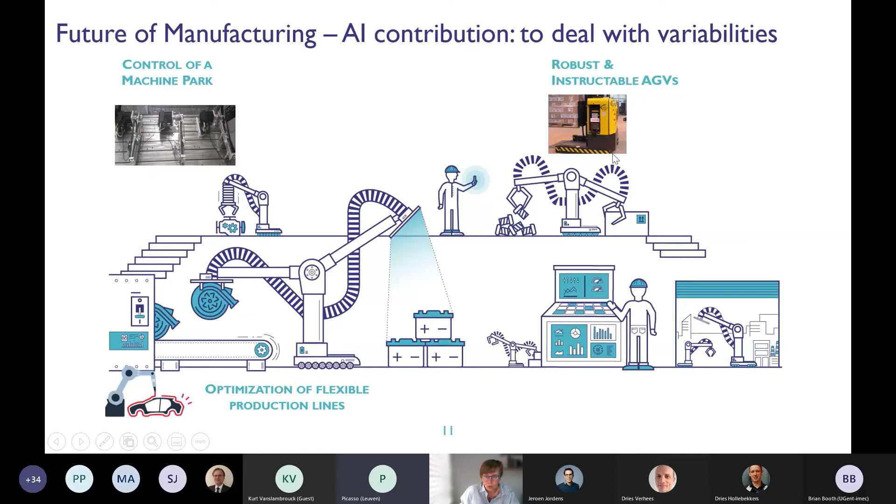It's one of the major topics of this webinar, but there's a whole series of webinars, and in the coming sessions you will also hear about our other applications or use cases, which can be control of a machine park. Also the AGVs, having robust and instructable AGVs. How can we also control robotic arms, collaborative robotic arms? How can an AI system assist an operator in, for instance, an assembly task? So the operator in interaction with the AI system is a very recurring topic.

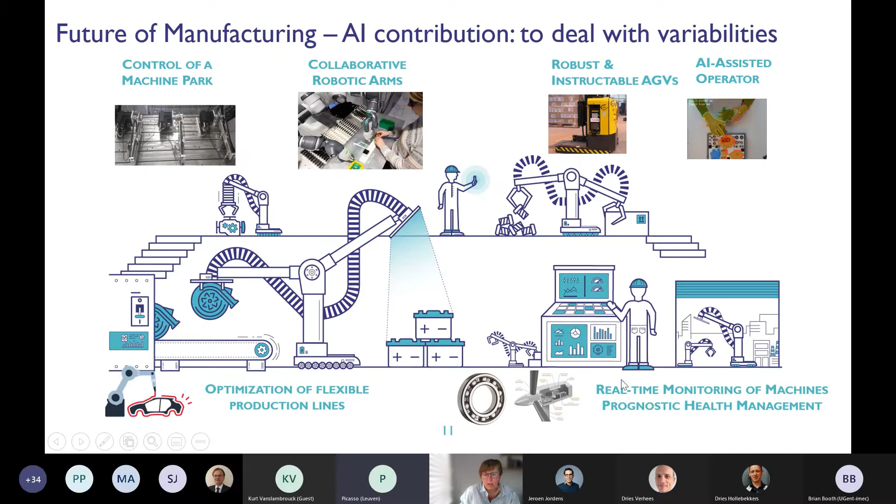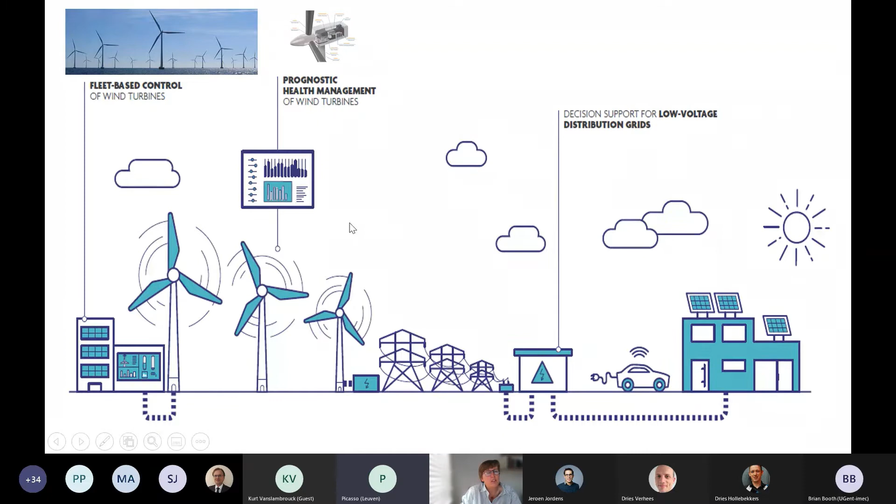But also other topics like real-time monitoring, anomaly detection, prognostic health management, and also a webinar is coming up on that in June. I showed the manufacturing plant, but the same can apply to energy, where we are looking into prognostic health management not only of industrial machines, but also wind turbines, or also at fleet-based control of wind turbines.

It's about the analysis of anomalies, for instance, in time series. It's sensing. It's about AI in the edge. So it really shows that the generic research challenges that we are tackling can really be applied to various applications. But let's go further into this series of which we have the first webinar today. So the use of AI for smart manufacturing and smart monitoring.

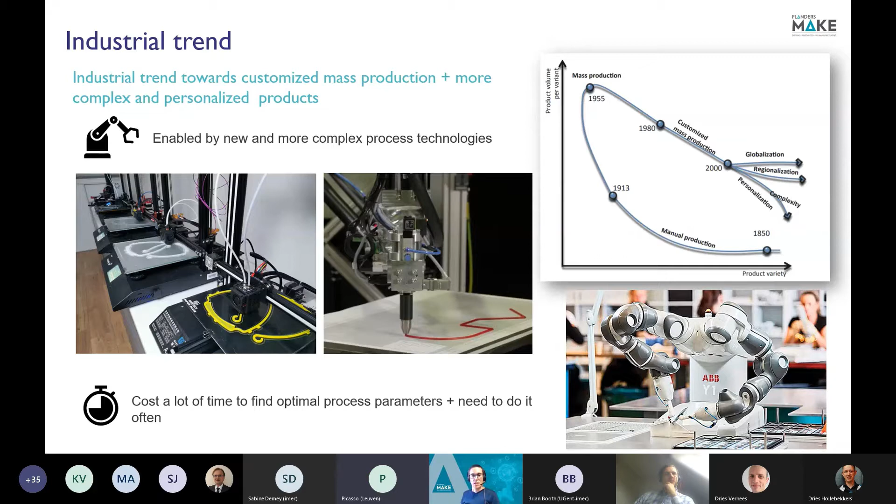The downside of these new technologies is that it costs a lot of time to find the optimal process parameters because they're more complex. And also you need to do it more often because it's personalized products, so the design can change from product to product. That's also what we're facing in the Joining and Materials lab at Flanders Make. So in this lab, we help companies or customers which have questions regarding adhesive bonding processes.

For example, if they want to join material A with material B, then we can guide them with selecting the proper adhesive or with designing the joint. But also we perform process optimization, where we really optimize the adhesive bonding process, all the parameters, not only on a lab scale, but also on an industrial scale. We have several industrial robots like the one you see here, which we use for this purpose. And in the end, we can also do validation, so also the real testing of the pieces.

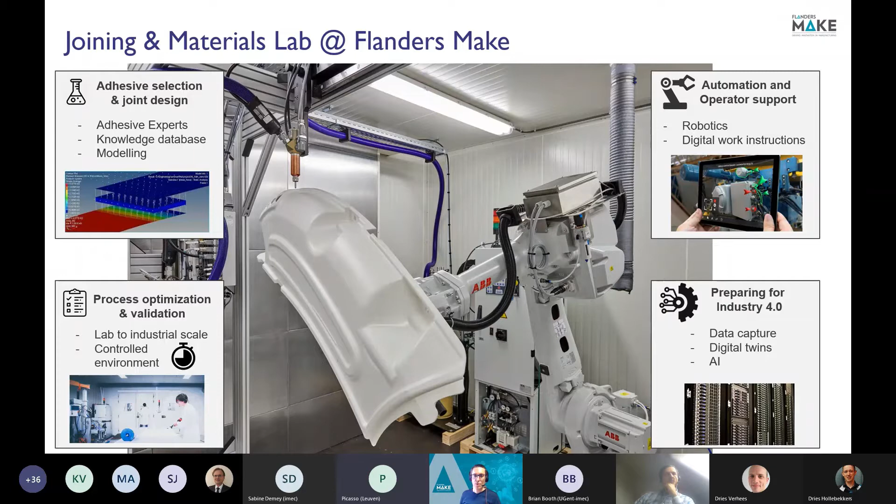Now, what we see is that during this process optimization, it takes a lot of time to find the optimal solution. So in order to tackle that, we're using different approaches within Flanders Make. One is automation and operator support. Another one is Industry 4.0. And AI is one of these technologies, and that will be the topic of the talk today. So here we want to enhance process optimization of an adhesive bonding process with the use of AI.

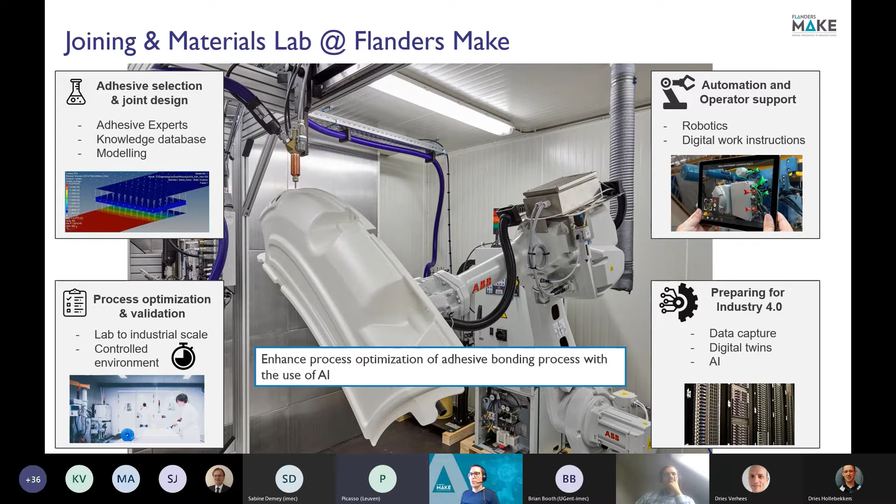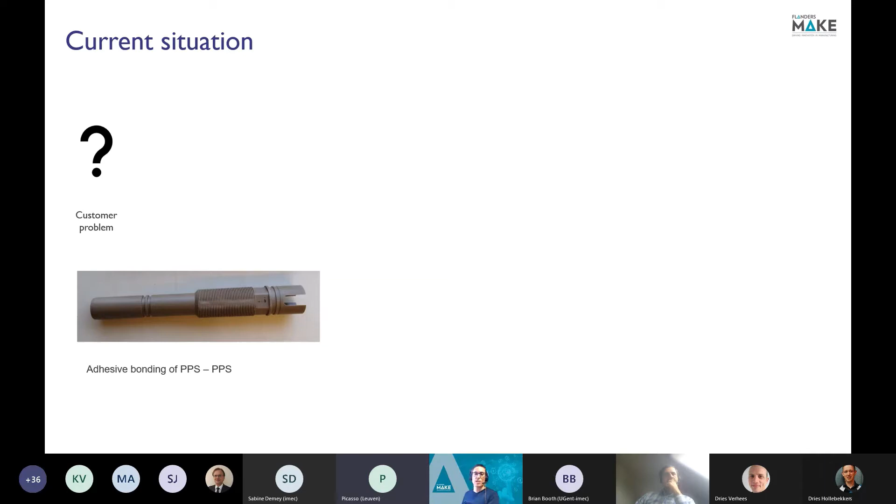So how do we currently perform process optimization, without AI? We first start from the customer problem. For example, if they have an adhesive bonding of two PPS materials, two plastic materials, we look at in what application this product will be used. And based on the problem, we define objective and constraints. For example, a bonding stress of minimum 8 megapascal, standard deviation below a certain threshold, and no visual damage as a constraint.

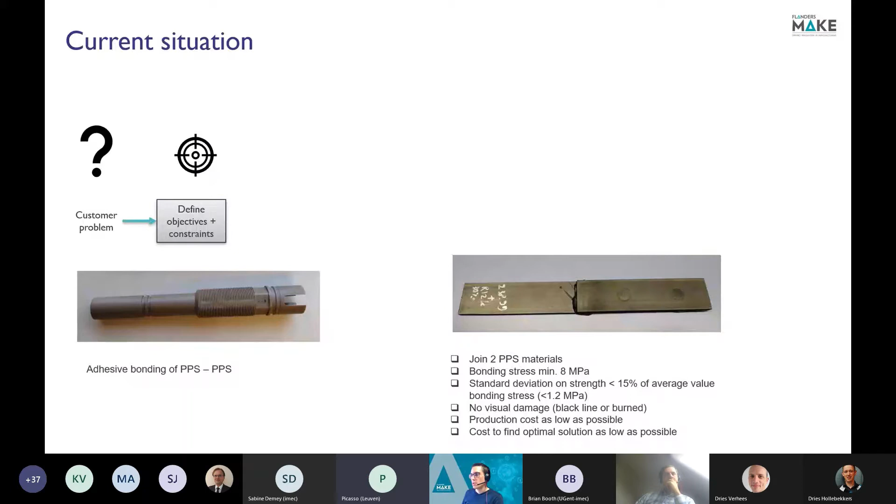Then the next step is that we select appropriate processes, parameters, and a suitable range. If you look at the adhesive bonding process on the high level, it consists of 3 main steps. First, you prepare the materials, the substrates. Second, you prepare the adhesive. And the last one is that you join everything together so that you create a product assembly. Now, within each of these steps, you can have several sub-steps.

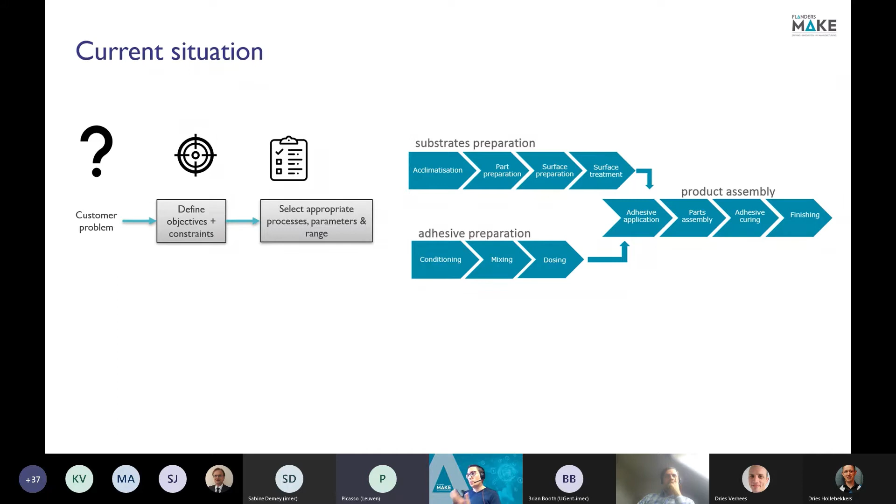For example, surface treatment, where you really prepare the surface of the material. You can do that in different ways, using several processes: laser treatment, grinding, grit blasting, plasma treatment, for example. So we say, for PPS, plasma treatment is a preferred process. Once we know that, we move further and select parameters which we think are useful to optimize. In this case, we selected 6 parameters, and we also define a range in which we think the optimal will be positioned.

Now, if we would test all the possible combinations of all the 6 parameters with all the ranges, it would be a huge amount of combinations that's infeasible to test. So that's the real challenge here, the situation that we have a huge amount of parameters.

And now you will see a poll popping up on your screen asking what is your biggest problem in process optimization. You will see several options. It can be that you have too many parameters. It can be that you have too few experts or too few sensors, or that the measurement technologies are not there. It can be lack of digitalization. Maybe you have too much data, which makes it difficult to process and analyze everything. Or maybe it's another option. So I will give you a little bit of time to vote.

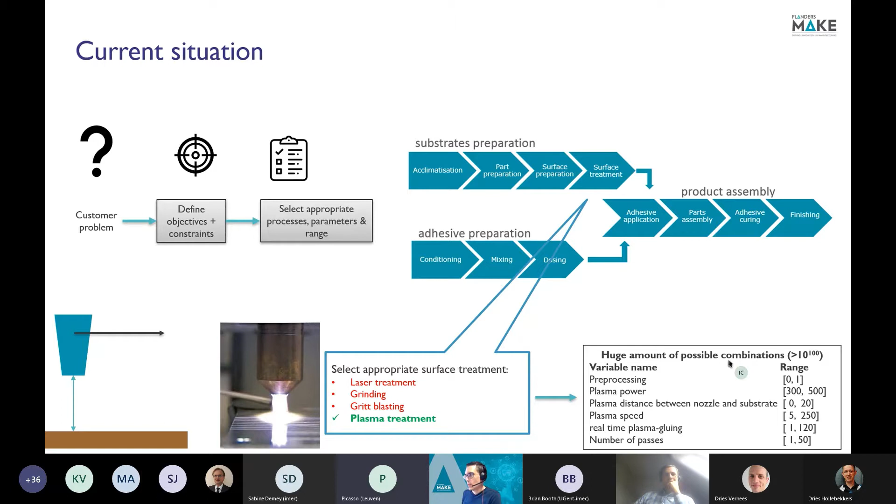So how do we normally, without AI, tackle this issue? We perform quick intermediate experiments. These are called contact angle measurements, and they can give an indication about the optimal solution. They can exclude certain conditions which are absolutely not optimal, but the downside is that they do not consider all the effects of plasma. So it can be that you're missing the optimal solution in the end.

But we select them because doing the real validation experiments, really gluing two parts together and testing them in a tensile bench, is too costly. It's about 10 euros per sample. So performing a lot of experiments would be too costly. That's why we perform these contact angle measurements.

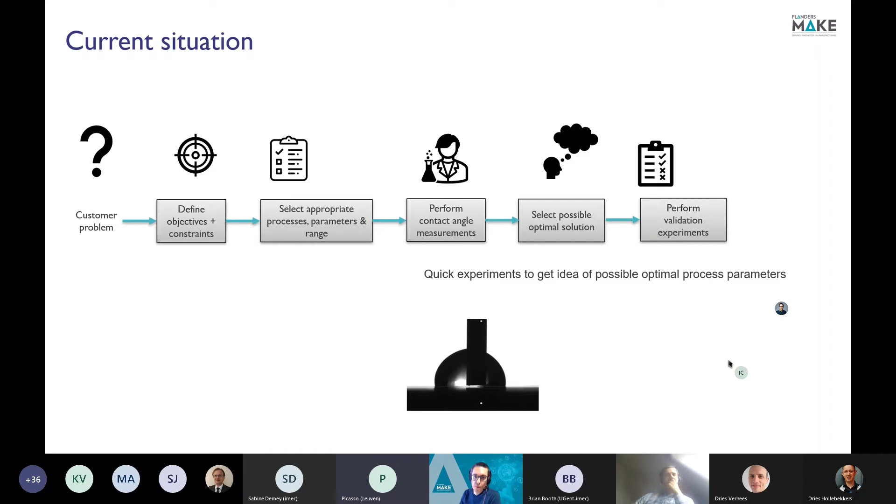Then we select possible optimal solutions based on the results, and then we still do the validation experiments to really confirm that the conditions that we selected are still okay or not. To perform the full validation experiments, we perform plasma, we do the full bonding process, we bond really two pieces together and perform a tensile test in the end.

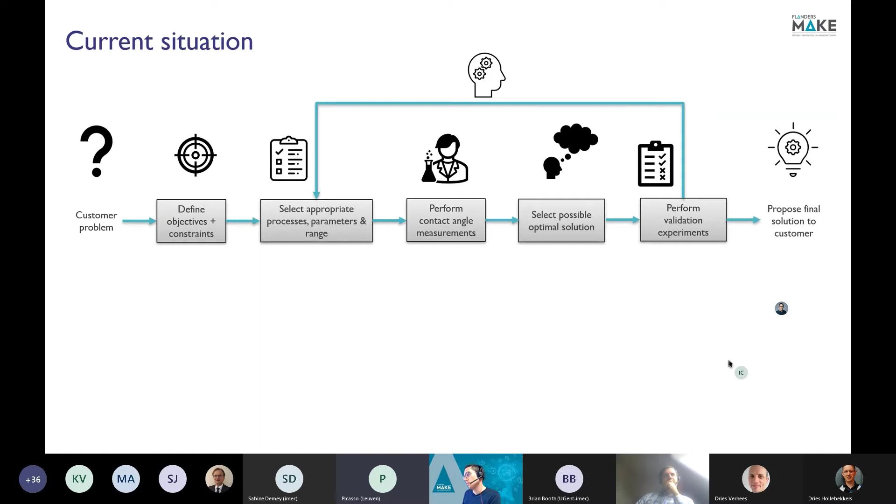Now, it often happens that in the end, the conditions are not met, so the requirements are not met. So then we need to rethink experiments. We need maybe to select additional parameters or extend the range. So we need to do another iteration, and then only if we're satisfied, then we propose our final solution to the customer.

Now, the downside is, like I mentioned, that validation experiments are really costly, that contact angle measurements only provide an indication. And the main cost is in the interpretation of the results and in planning. So that's a lot of huge cost factors. So if we can reduce that, that would be very beneficial. And there are several iterations needed, and you don't know upfront how many you need. So there is need for a tool to find the optimum with less experiments and get an idea about the confidence on the final result.

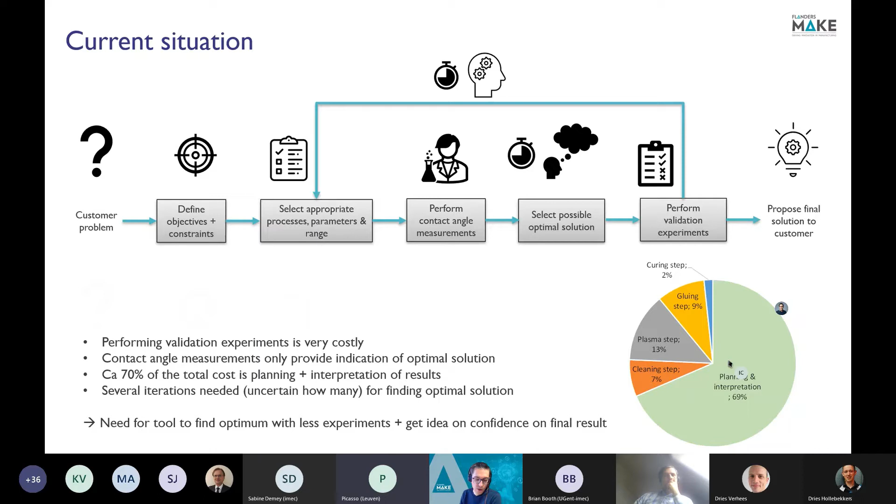So that's in the topic of the data efficient AI, like Sabine mentioned before. So that's what we're working on right now. Together with University of Ghent and UHasselt, we're working on a kind of process optimization toolbox where we feed in: these are the parameters we want to optimize, this is the range in which we expect the optimum. And then this process optimization toolbox will tell you, okay, now perform these validation experiments. It will select them in a clever way.

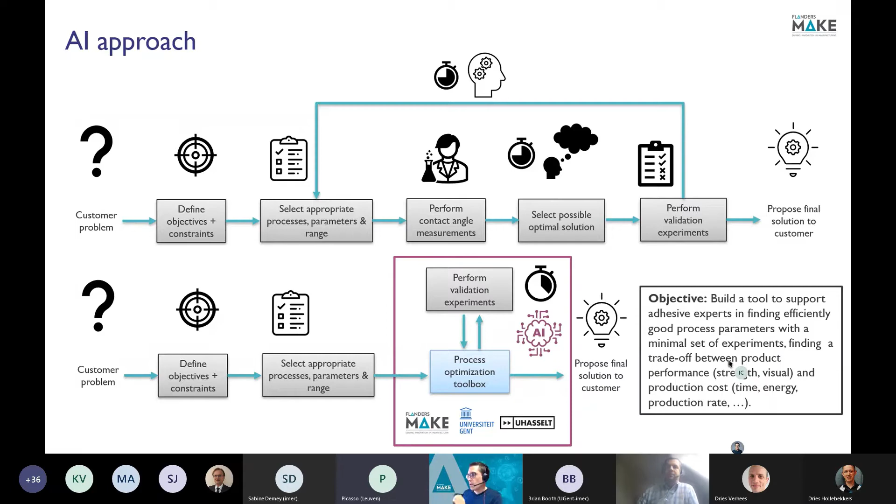You feed back the results, and then you get an idea about the confidence. It will provide new experiments to perform, etc. You do several iterations till you're satisfied with the final result, and then you can propose a final solution to the customer. And the goal is that we reduce the time to find this optimal solution with AI, and build a tool which can support the adhesive expert in finding good process parameters, and also with finding trade-offs between, for example, the product performance, like the strength, and the production cost in the end. But how this works will be explained by my colleague Ivo in the next slides.

Yeah, thank you, Jeroen. So my name is Ivo Couckuyt. I'm from the ID Lab research group of Ghent University, and I will be explaining about data efficient process optimization. These results are in collaboration with the group of Inneke Van Nieuwenhuyse from the University of Hasselt.

So how do we currently search in process optimization? Often classical design of experiments are used, but the problem there is that if you choose too few experiments, then the optimum will not be included, and you will have to create a new design of experiments. Or if you choose the design of experiments to be too big, too many experiments, then you will take more time than is needed to find the optimum. And this is often combined in a trial and error fashion, where you do one design of experiments, analyze the results, and then you do a completely new design of experiments in another area, for instance, to try and find the optimum.

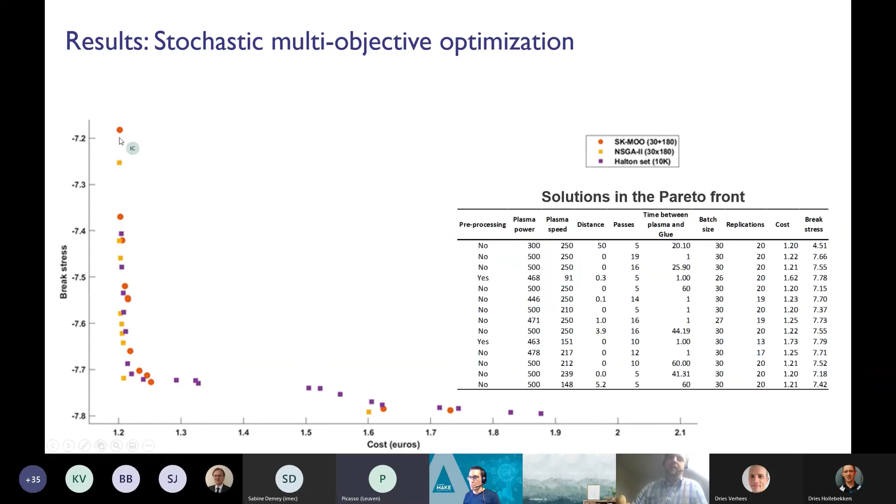Okay, so we tested this method now on simulations. And the idea that we also had is, okay, now we're starting also to check it on real-life experiments where we really bond two pieces together and really perform the tensile test in the end.

So what we did here was we first constructed a small design of experiments with 30 different parameter settings. Then we performed the real-life validation experiments. In total, we did 150 data points. And we also tested them, and we're now updating or creating the machine learning model. We didn't close the cycle yet, so we didn't select additional experiments yet.

We didn't do multiple iterations, but what we already did was we looked at the cost analysis, or the cost benefit. So on the one hand, we compared production costs, so the cost to produce one piece of this assembly. So we looked at materials cost, operator time, machine time, energy, etc. And on the other hand, we also looked at the cost to find the optimal solution based on the engineering time to design experiments, to analyze results, but also on the cost to perform the experiments.

And up to now, we didn't complete the cycle yet, but we already saw a significant advantage by using the AI approach. So we compared the approach that Ivo explained before with a traditional approach where we use the contact angle measurements. And what we see is that we can achieve a 2% reduction in production cost already with 15% lower cost to find the optimal solution.

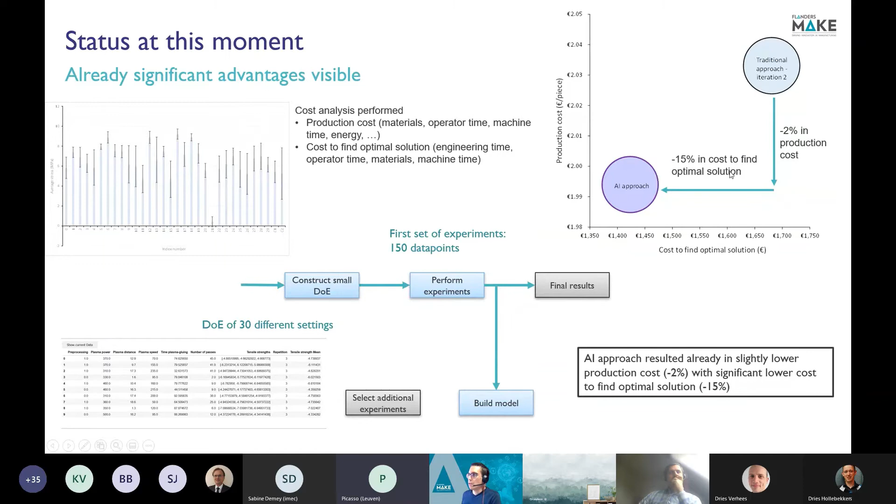So this indicates that this AI approach can show significant advantages. And we hope, of course, that we can reduce this production cost even further, while we still take into account that this cost to find the optimal solution will not be too large, of course.

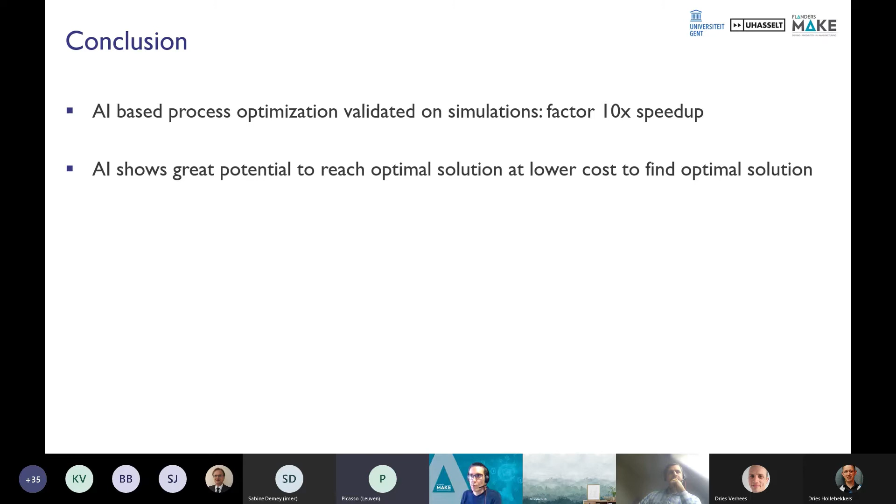So as a conclusion, we can state that this AI-based process optimization has been validated on simulations, and we saw a factor 10 speed-up there. And we're also busy testing it now on real-life experiments, and there we already see a significant advantage, even if we didn't complete the cycle yet.

The future plan is to complete the cycle, validate the AI approach also on these measurements, and also to incorporate constraints, like, for example, if we have visual damage, that we should exclude these samples, and also include measurement uncertainty.

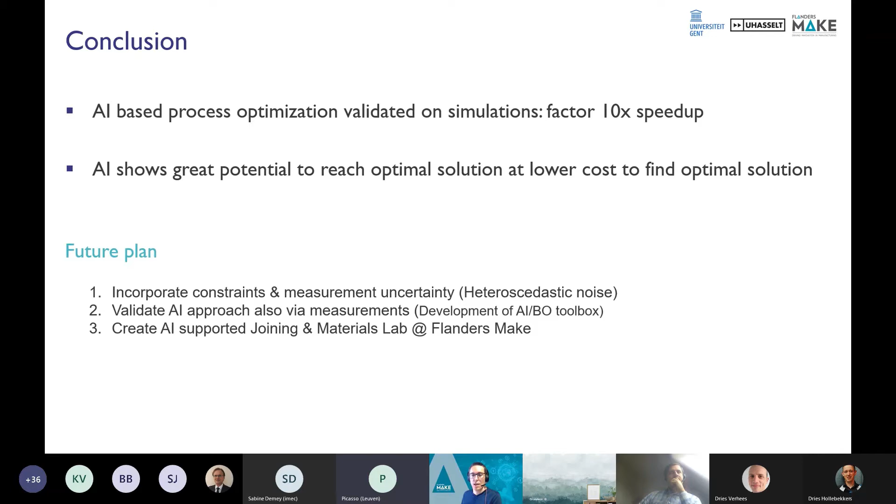And finally, the end goal for Flanders Make would be that we create a kind of AI-supported joining materials lab. So there, the idea is that we do not only focus on process optimization, so the box on the right, but also that we use AI in the steps before it. So right now we're working on defining objective and constraints based on AI.

So we created there an adhesive selector tool, which can, for example, suggest possible adhesives based on inputs that you provide. So for example, if you say, okay, I need an adhesive with a strength of at least 10 megapascal, and it should work in a temperature range of 10 degrees Celsius till 40 degrees Celsius, for example, and I have other constraints, then this tool can look in a database of adhesives and use AI to suggest possible adhesives which can satisfy these conditions.

And the other way around, you can also select an adhesive and then it can tell you, for example, the temperature range in which you can apply the adhesive or the timings, etc. We're also applying this tool for a second approach where we want to select appropriate processes, parameters, and the range. So that's a similar one.

And the nice thing about these tools is also that they can capture expert knowledge. So if you have too few experts, for example, like a few of you indicated in the poll, this tool is also interesting so that it can capture expert knowledge and put it into a kind of AI-based tool.

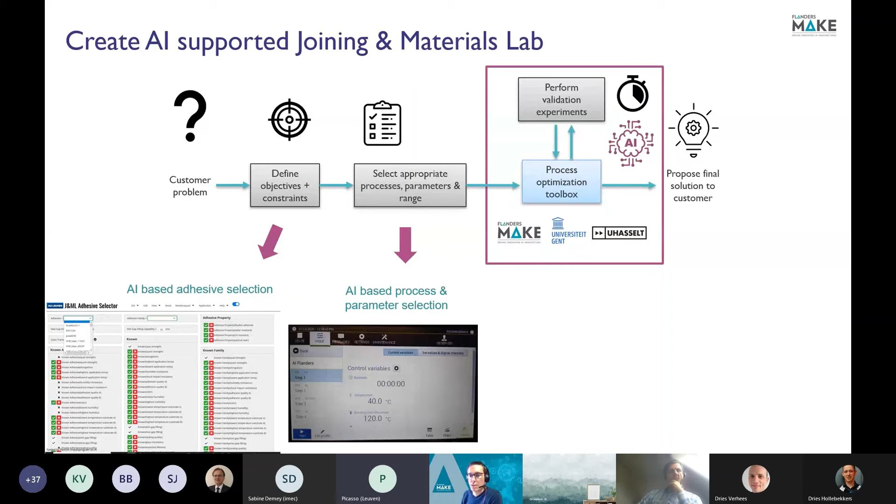And finally, we're also working on automation and digitalization of the lab so that we connect all equipment to the cloud, for example, and use automation so that, for example, the validation experiments can be performed in an automatic way. And in that way we can reduce the cost to find an optimum solution or perform process optimization in the end.

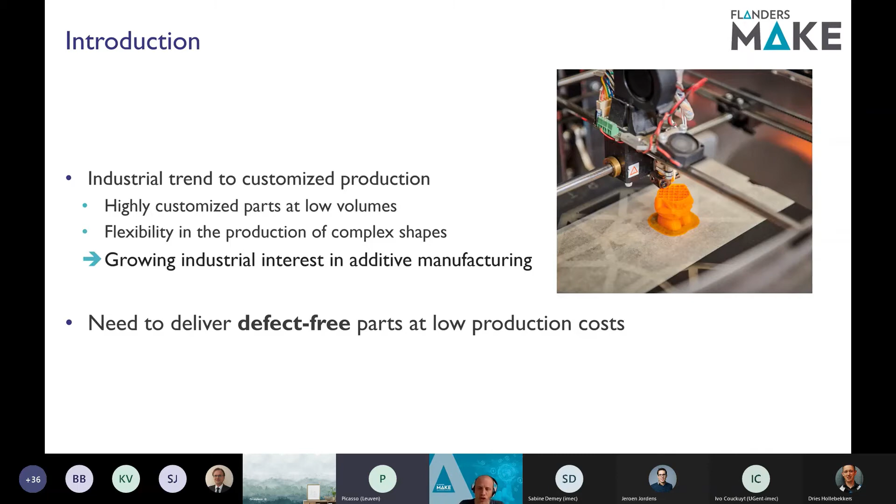So before diving into the challenges, I would first bring you all on the same page and briefly explain what additive manufacturing is. Additive manufacturing is a group of techniques that allow you to build objects layer by layer, starting from a computer design. A designer designs an object in software, and this CAD drawing is then sent to an additive manufacturing machine to build the object layer by layer.

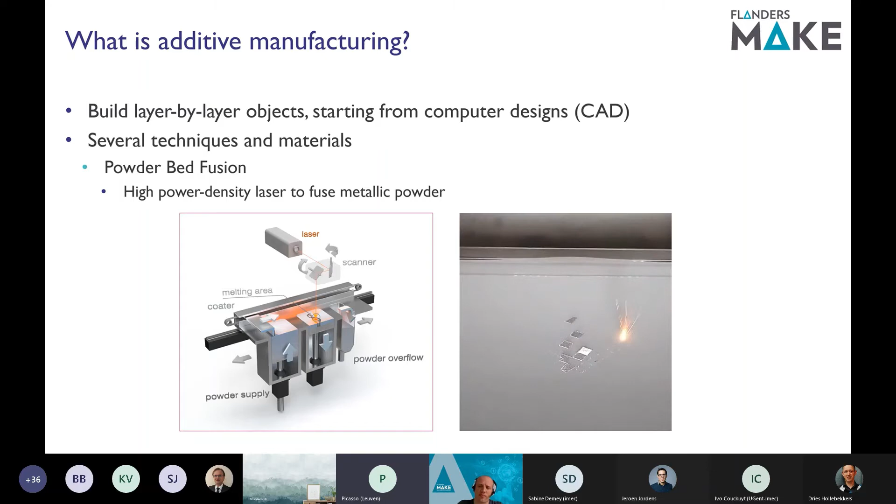There are several techniques and materials available, and during this presentation we will focus on one technique, which is the powder bed fusion technique, where a high power density laser will fuse metallic powder to build the object layer by layer, as you can see in the movie on this slide. This technique is very popular. It's used, for example, in the medical industry to create medical parts like implants. It's also used in machine components, for example, turbine blades, or functional parts in aerospace.

And before going to some solutions, I would ask you if you are confronted with quality assurance challenges in your process. You should see a poll at the moment: either you don't have these challenges, or you have these challenges and already have implemented a solution, or you have these challenges and at the moment you have no way to deal with them in an automatic way. I'll give you a couple of seconds to complete the question.

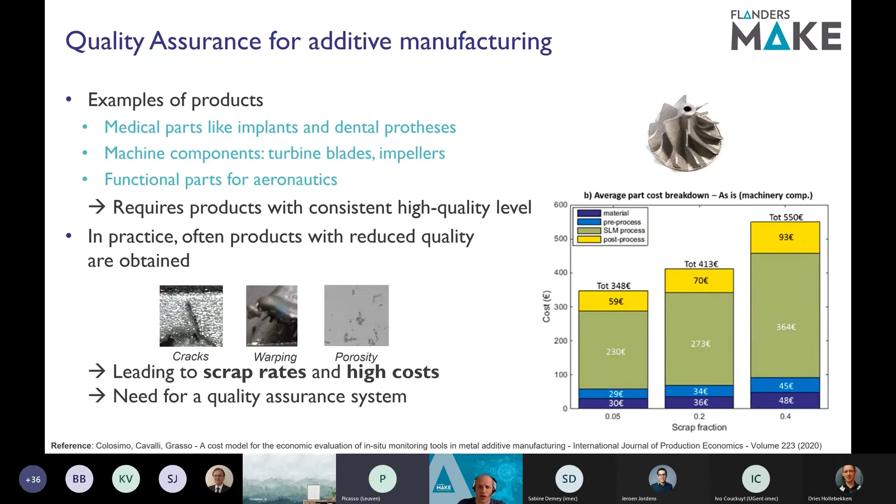So the process itself. The additive manufacturing process has many inputs. You have, for example, machine parameters, so actually the printer that you have and its configuration. These are typically constraints. You also have the material properties. These are definitely constraints because you need to take a certain material and you can't change the material properties of that material. On the other hand, you have the input, the design requirements, so the geometry of the object. And you have scanning parameters.

By scanning parameters, we mean the settings of the laser that is traveling. So for example, the path that the laser is traveling, the speed of the laser, the power of the laser, and many more. And what we know is that speed and power actually have a big influence on the energy in the melt pool, so the energy that you use to melt the powder into solid material. And this energy is highly correlated with the porosity that we see in the object.

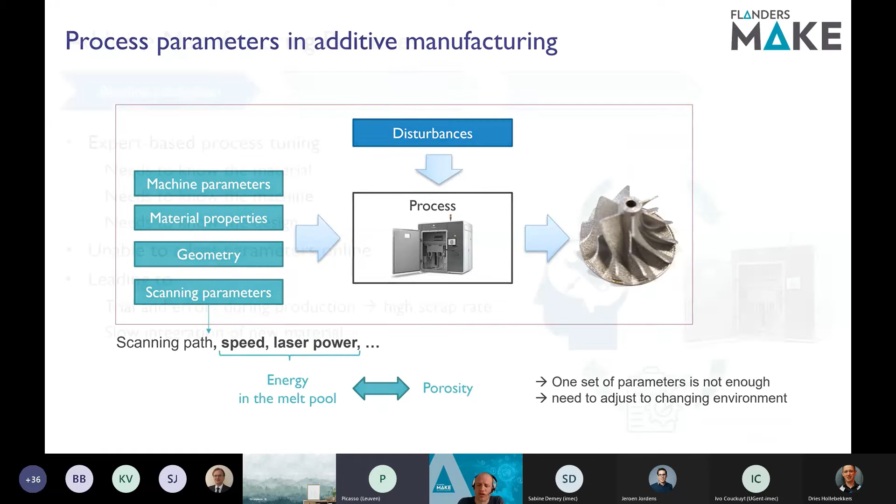And due to uncertainties and disturbances in the process, we know that one set of parameters is not sufficient. We do need to adjust these parameters to changing environments during the print process. And that's what we will focus on during this talk. So how is it done nowadays?

If you, for example, want to go into additive manufacturing, you buy a printer from one of the suppliers. You get a printer, but you still need an expert that will control and configure this printer. The expert needs to know the material that you're printing, the machine with all its constraints and functions, and the design that you're printing, because the design will have an influence on the quality and the parameters. Based on that expert knowledge, he or she will define the most optimal process parameters for that particular print, and then the print is executed in the machine.

At the end of the print, the expert will inspect the product, or do an offline CT scan or Archimedes test to inspect the quality. And based on the achieved quality, the expert will decide to change the parameters for the next print. As you can guess, this leads to a lot of trial and error during production, and hence a high scrap rate, which is not desired. Also, if there is a new material or a very complex design, that typically takes some time. So you have slow integration because the expert is always in the loop with some trial and error.

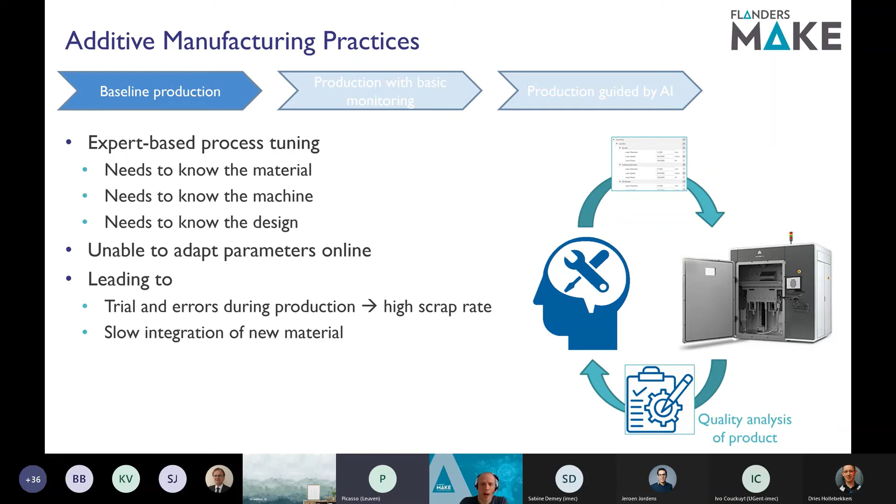But nowadays, many machine builders offer monitoring solutions in their machines as an add-on. You can install additional monitoring in your machine, and this monitoring will give you an indication of the part quality or critical events happening during the print. But as it gives only an indication, the actual interpretation of what is truly happening and what actions are required is still left to the user. So it gives the expert additional info, but the decisions, whether to abort the print or change parameters, are still up to the expert.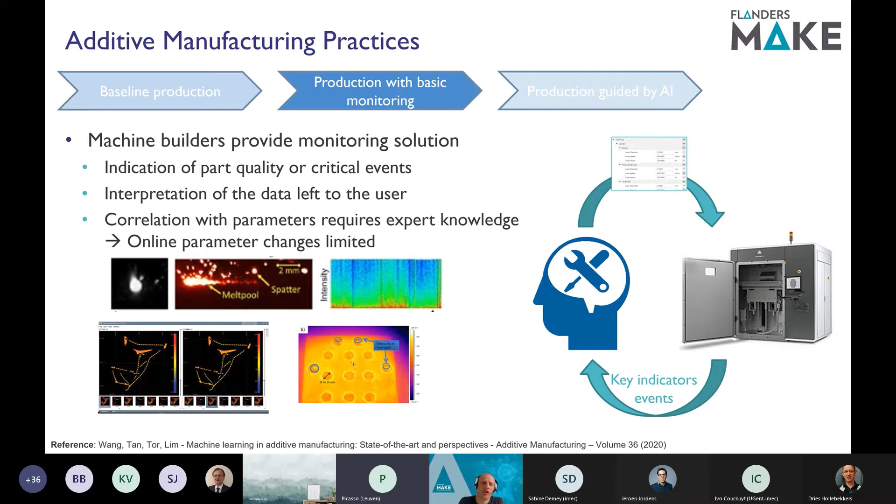And since the expert is in the loop, online control of these parameters is very limited or hardly possible, because the process is very fast. I haven't mentioned it before, but the laser is typically controlled at 100 kilohertz. It's moving at 1 meter per second. So no human can be in the loop in order to change parameters.

So what we will present is actually the next step, where we guide the production and the process by artificial intelligence. We will put in place an online quality assessment tool that will give an online assessment with direct feedback into the process.

Hence, the process itself can run automatically, and the expert involvement is only needed at machine commissioning. And this will lead to, of course, less iterations and hence lower scrap rates. So here you see the three possible ways of our methods or steps in order for a production.

So my question to you is, okay, if we look to your process, where are you today? Are you fully relying on experts? Do you have some monitoring in place? Or do you have already monitoring with artificial intelligence that will finally guide your production or process?

Let's see if there are already some results. So we see again at the moment that 50% of the people that have voted, they have monitoring already, and that's good, but they still need some expert in the loop to address the issues and look into the monitoring signals.

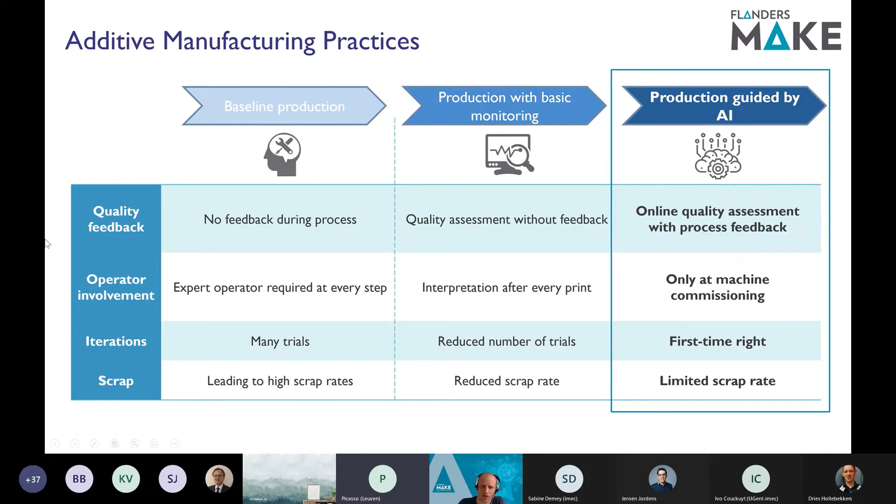So to continue around this topic, production guided by AI. What we will propose for additive manufacturing, but it's applicable to many other processes, is actually two blocks. On the one hand, we have the sensing, so the monitoring, which is typically already to a certain extent in place. We've made an artificial intelligence tool that will allow to run this sensing online. So in our case, it's at 100 kilohertz.

That will do at 100 kilohertz online a quality assessment, and will actually build up a quality model online and give real-time quality indicators. These quality indicators are then taken up by the control unit, and based on that we will decide whether we need to change one of the parameters in order to achieve better quality.

Next to that, we also have an offline loop, which I'm not going into much detail during this presentation, but offline from time to time, we analyze a printed object using, for example, X-ray or Archimedes test. Together with some artificial intelligence and classification, we use this as training and validation of the online modules, so the smart sensing and the smart control.

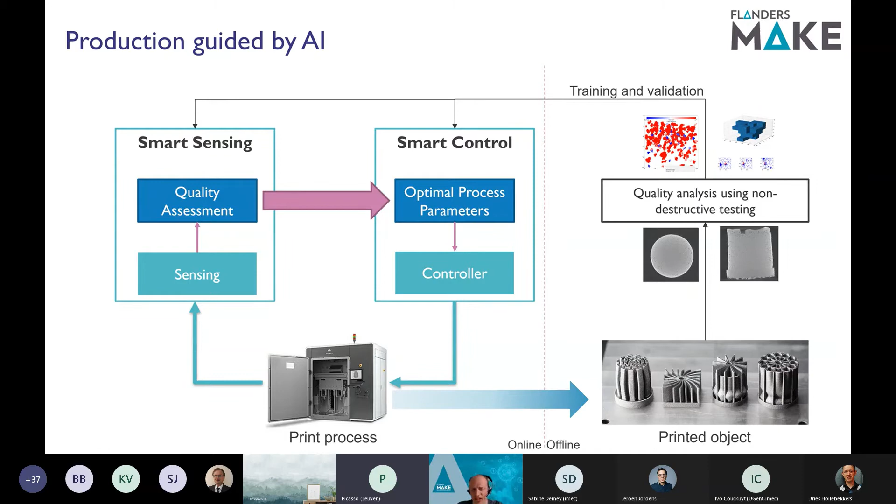Okay, thank you, Dries. So as we were saying, this edge learning problem we're dealing with needs a fast solution because it is running at 100 kilohertz. And so what we decided to do is to model this problem using anomaly detection, where we're just going to simply identify any abnormal behavior in the build process.

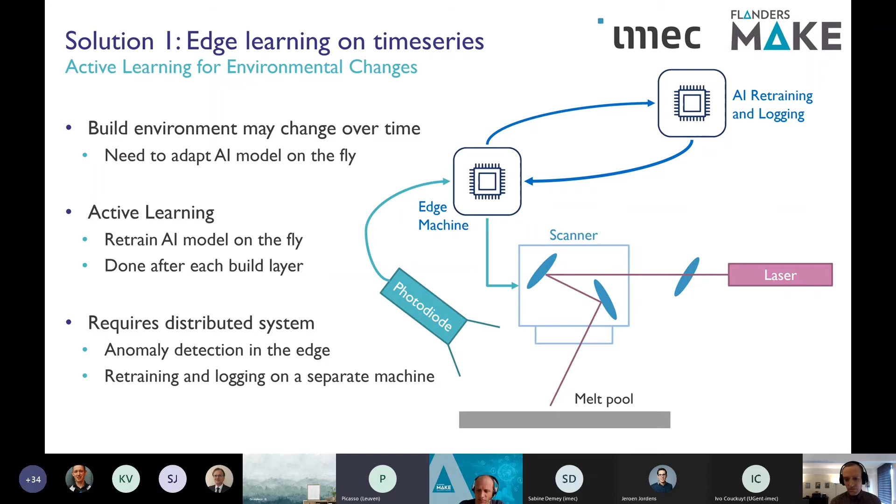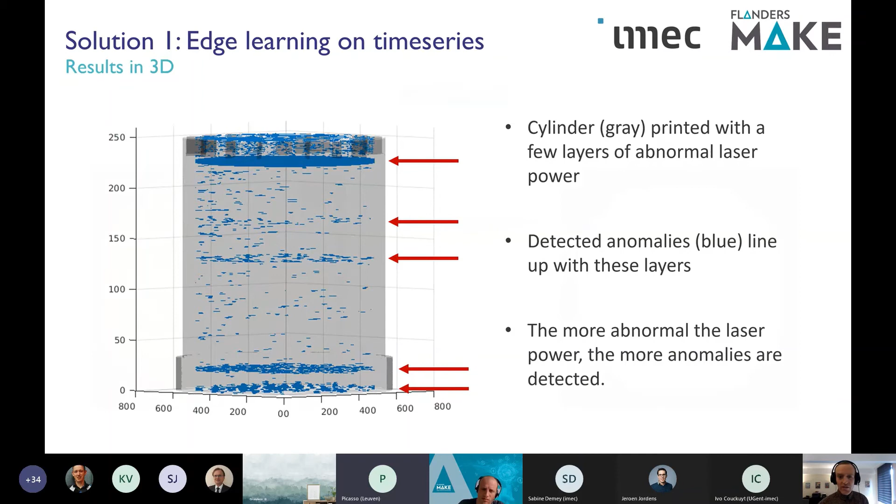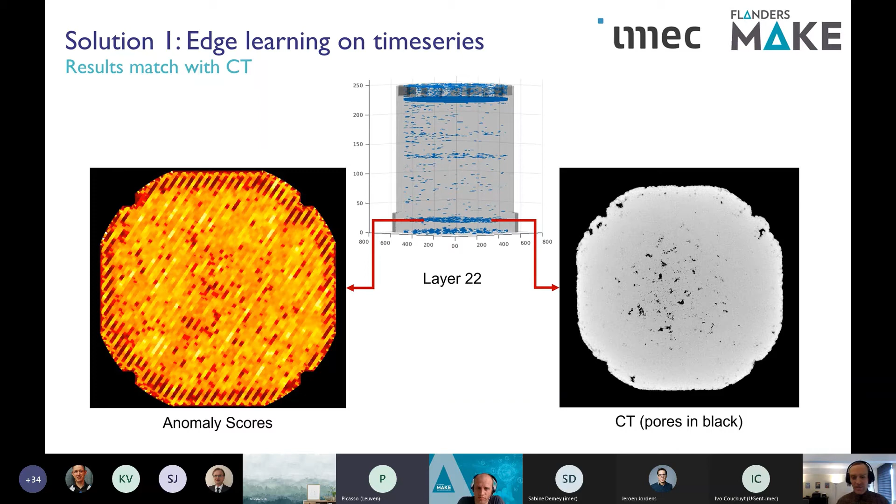And so these are the types of defects we want to avoid. And so the fact that we're seeing the anomaly scores correlating with those defects gives us a decent indication that this type of an approach would be helpful for online control. So with that being said, I'll hand it back to Dries for the other system.

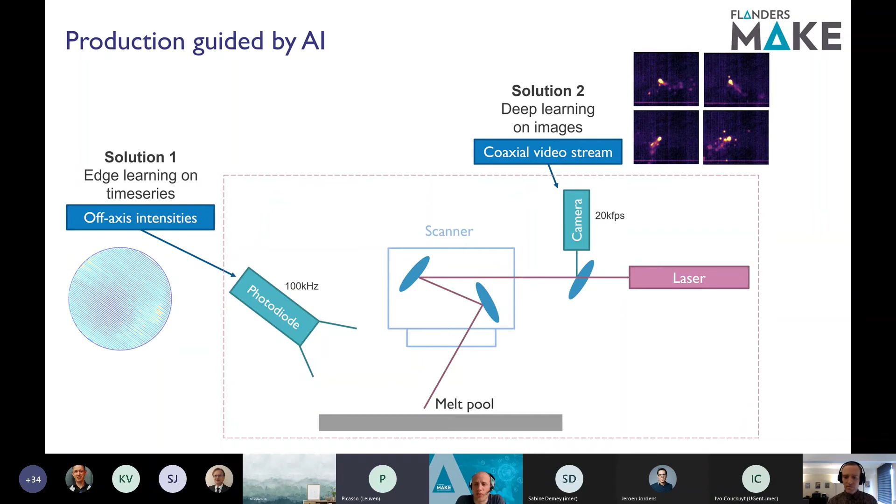Thank you, Brian. So Brian has explained the solution 1 here, the edge learning on time series. And I will briefly talk about another solution which actually uses deep learning on images. And therefore we have installed a camera next to the laser that will actually take a high-speed video of the laser traveling on the build area. So the camera will follow the laser through the mirrors and record the high-speed video stream. So the goal of this technique is actually to estimate and control the process parameter using this high-speed video.

And as explained before, we know that the actual melting regime might deviate from the optimal one, and that could depend on, for example, material quality, so the metallic powder, the object design, but also unpredictable events happening during the print, or fluctuating machine parameters that we're not aware of. And all of this we need to capture in the AI module. So the AI module will actually output the process deviation from the optimal melting regime. And this deviation can then be fed back into the process control in order to change the control variables.

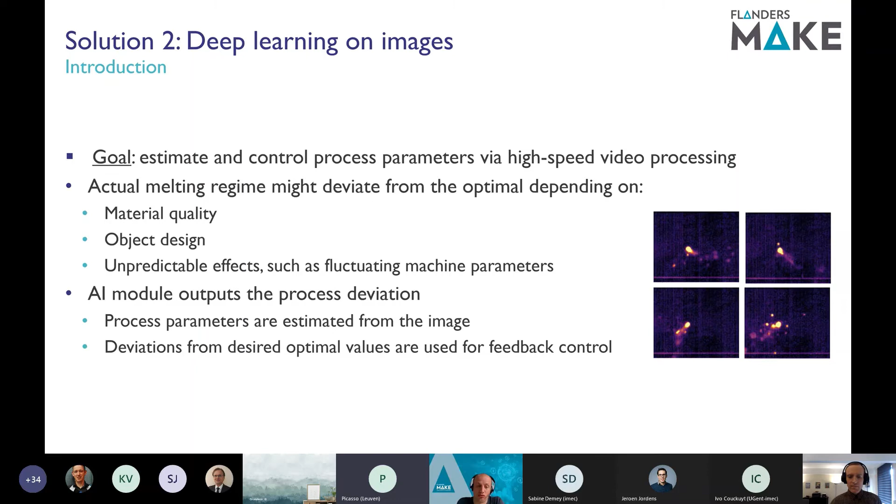So this method works as follows. When there is a new machine or a new material, we are actually executing a kind of a calibration print or calibration period. And during this print, we print at different settings. So we have a number of settings, so here A, B, C, and many more. We collect some data for each setting. So for each setting, we actually have a short video stream.

And this training data is then fed into a convolutional neural network to find features. So this network will learn how it can derive the system settings from this image by looking to certain patterns or deviations in the image. So we get actually a mapping from the recorded video frame onto system settings. So after training, if you want to test it, here you see some results.

So here we actually changed the power of the print in the first experiment on the top. On the left-hand side, you see the recorded video. So this is the raw video. And on the right-hand side, you see the predictions by the AI module. And what we see, if we increase the power, we see that the AI module predicts that the power is higher than optimal, and this is indicated by the orange color, but the speed is still optimal, indicated by the green color. So if we use this as input in the controller, we know that we need to change the power and keep the speed constant.

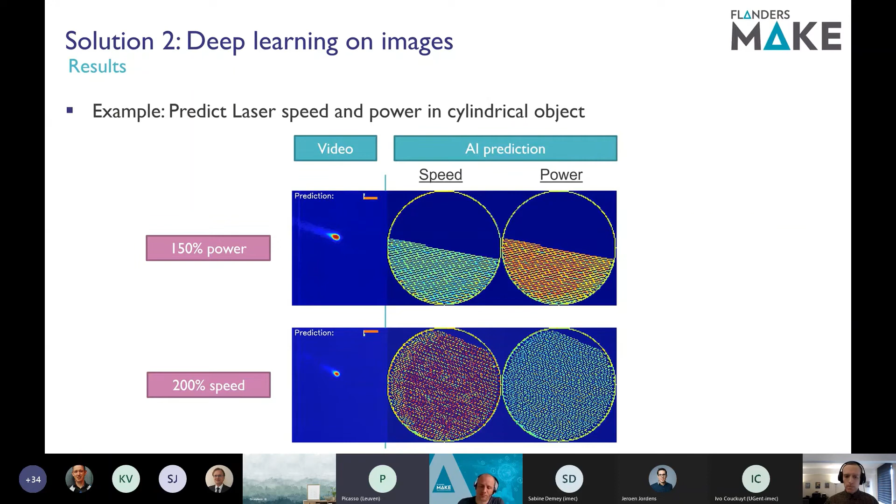So if you want to apply this technique on a machine, as mentioned before, we will need to do a calibration print and train it once, and afterwards it will run continuously. Maybe over time we'll need some recalibration because of machine changes or material changes, but overall, once it's calibrated, it's ready to run. In order to speed up this process, especially if you have many machines or many materials, we can also apply transfer learning, so that you can learn from the other machine such that you need less training time.

And as I explained, the output of the module is actually a deviation from the optimal parameters, and this is then direct feedback for the controller. Of course, as it is research, there are still some items that are in progress. At the moment, this is not yet fast enough for real-time control. Real-time control, we're talking about 20 kilohertz. At the moment, we can't get to that speed, although it's already applicable for layer-wise control. Layer-wise means for each print layer, you adapt the settings for the next layer. Of course, we're still looking into speeding up such that we can achieve the required frequency.

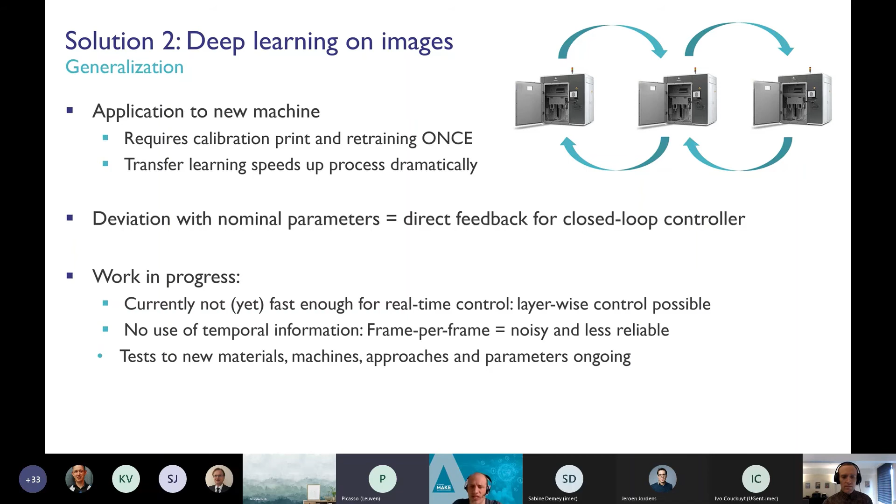As it works frame by frame, we don't consider at the moment any temporal information. Hence, it's a bit more noisy and less reliable. But this can be solved in a couple of ways, and we're still looking into that. And also testing it on new materials, machines, and parameters is still ongoing.

To finish this talk, we've presented to you two techniques. One technique is an edge learning technique on time series, which requires some nominal reference at the start of a print, and then online adapts its model and detects abnormal behavior. As it is working with features, it can be combined with process knowledge. So if you have an expert that has some process knowledge, it can be taken into account.

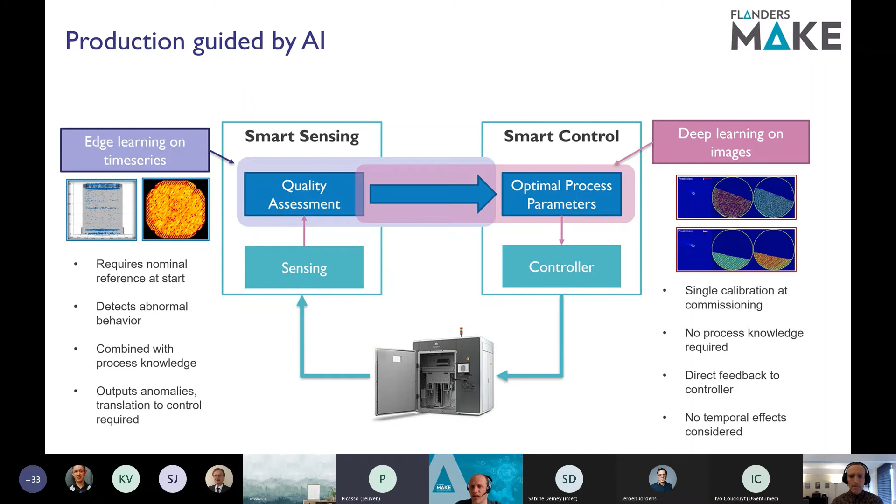On the other hand, we've also shown a deep learning technique where you don't need to have any process knowledge, or you can't even take it into account because it learns by itself. But you need only a single calibration at commissioning, and the output of this module gives direct feedback into the controller, as it gives the deviation of the controllable parameters as output.

So to conclude, we've presented two solutions that have impact on additive manufacturing. This will allow to produce 3D parts at higher quality, hence less waste and improved productivity. We're currently looking if we can integrate multiple sources, like sensor fusion. We've presented two techniques independently, but as they are looking at the same process, it's very interesting to merge them if you have both sensing techniques available. And we're also looking at how we can speed up the training and the validation automatically.

So I've presented this on an additive manufacturing case. Of course, this is applicable to other processes that need industrial monitoring. If, for example, you have sensing and need to find the relation with the process, or you see a need for online monitoring of the process parameters to keep them stable, or you need some real-time quality assessment, this could be very interesting for those kinds of challenges.

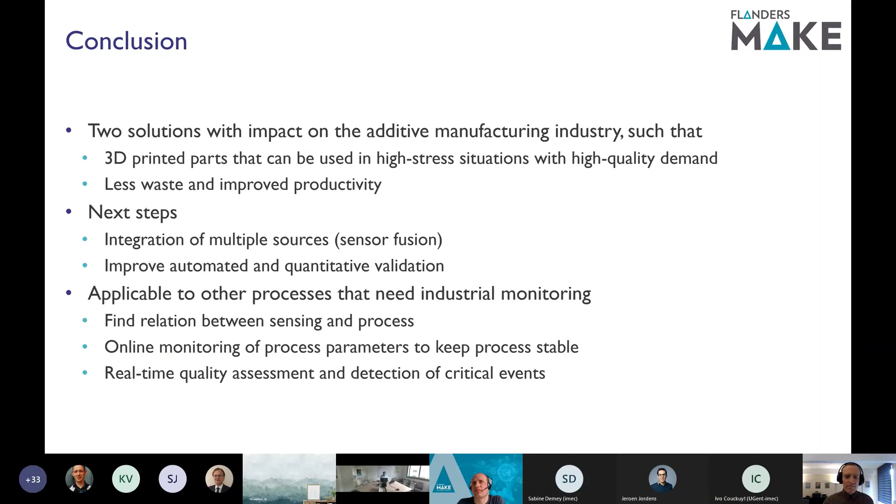The next presentation is going to be given by an industrial partner, ML6. The title of the presentation is how machine learning can improve efficiency and reduce the carbon footprint of production processes. It's going to be given by Nicolas Deruytter, Managing Director of ML6. So a short intro to Nicolas. He founded ML6 in December 2012, and he is energized by realizing a meaningful impact on business, people, and society. He is a speaker at multiple events covering topics from innovation to practical application. He also gives lectures at Vlerick Business School in the AI and Big Data program.

So Nicolas holds his master in engineering, operation research, industrial engineering, and mechatronics from Ghent University. Maybe also good to mention that ML6 is classified as a Trends Gazelle, which is in fact a classification of fast-growing companies. So Nicolas, please go ahead.

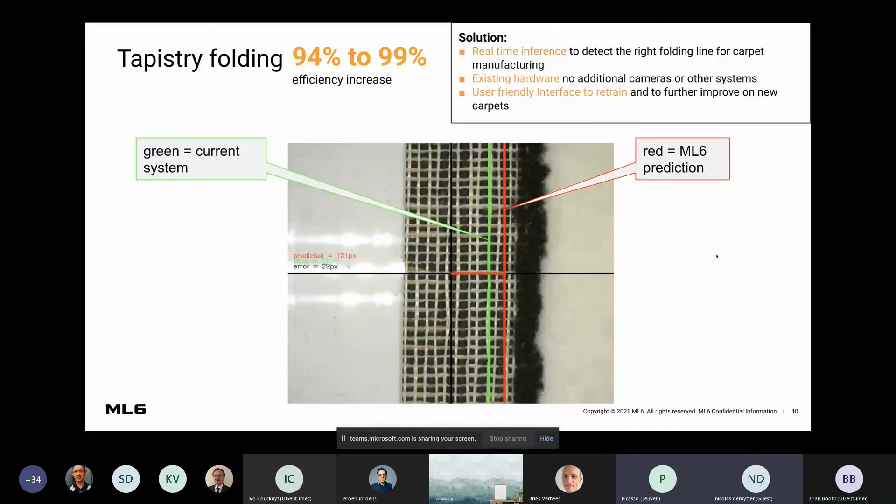So here you can see an example, a small video of how the prediction line is evolving. But one of the things that we've done there is specifically create a very small custom tool, which shows the accuracy and the likelihood in a visual way, in a clustered way. So the operator, who is at the machine day by day, can really see what is going wrong and what is going right.

And by providing this visibility, we could identify a couple of scenarios that were happening. One, the model makes mistakes; it hasn't seen enough training data. Secondly, the labels are wrong. A very nice example is the one on the bottom left, where we could see that the training data that we received was just plain wrong. And by showing that in a visual way, it really helped in understanding and creating a support base to further adopt the tool.

We also had scenarios where the model outperformed, which is actually what we want. And we also had scenarios where we don't really know, okay, what is now the right line that we need to choose? And that's the case in the top left. So by providing this visibility and this interactivity to the operator, it helped him to understand what was going on and how to further improve the system.

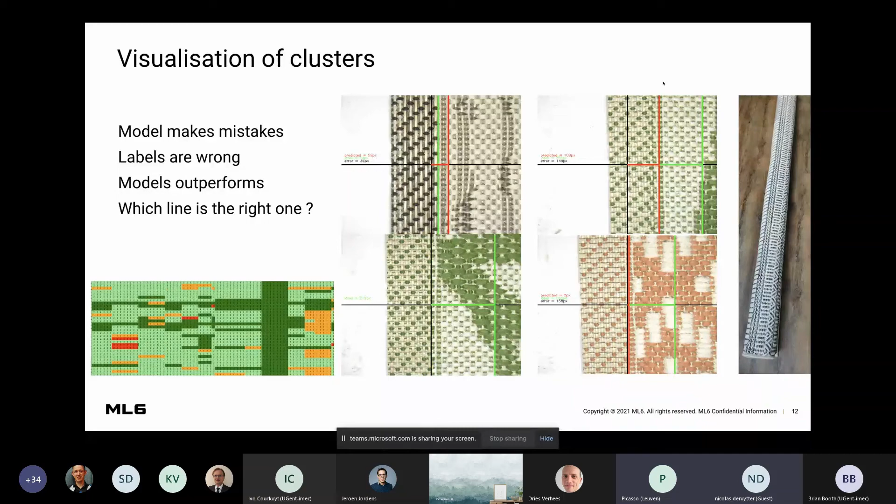On the right, this is our very first carpet that we received when the model was completely released and completely running into production. It's not the prettiest one, but hey, it's in our office and we're very proud of it. So that's the first part. It's all about visualization. The second part is about interpretable models.

So the first thing you can do is to decompose your model. You can find packages online, a computer vision model, you run it, and it's basically a black box to do everything. What's more interesting is that you take it and split it up into smaller subproblems. So imagine that you need to detect a zebra on a picture. It's better then to detect, okay, let's start with whether or not this is a horse-like creature versus something completely different, and then you dive deeper into specific neural networks designed for detecting zebras, for instance.

So one of the recent papers is neural-backed decision trees. There are many more. But that's quite interesting, and it's working quite well in practice and something we apply all the time. Knowledge graphs, I have a nice example following this slide, but by infusing a semantic database, it really helps in providing a language to certain anomaly detection rules, for instance.

Typically in a production setting, what people really understand is things like, okay, if temperature decreases this amount, then we engage this compressor. And so by using knowledge graphs, you can store that information, but you can have, for instance, anomaly detection models that suggest new rules to be added to the semantic data store. And when you add them, it makes complete and perfect sense for the operator.

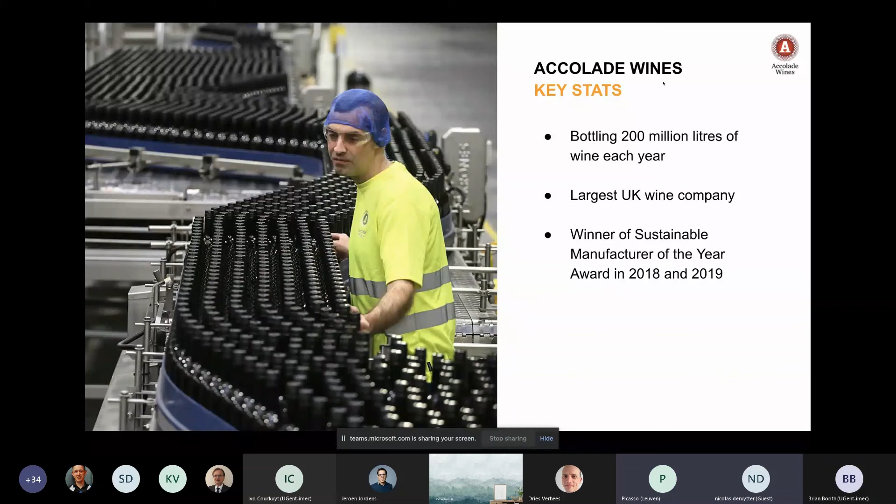So moving forward, a customer case is Accolade Wines. It's a company in the UK that bottles wine, 200 million liters to be exact per year. And they won quite a bit of awards in terms of sustainability. And it's one of the largest companies in the UK in terms of wine bottling. So the challenge they posed upon us is basically, okay, we're losing wine and we don't know where it's being lost. About 1.8 million liters per year. And they actually did not have a clue of when, where, why the wine was being lost.

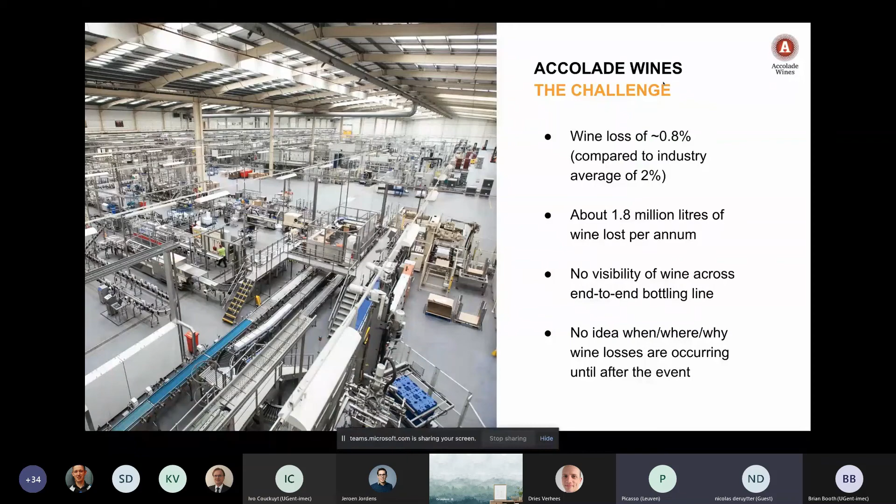Just a quick heads up about the process. It's actually very straightforward. Wine comes in, it's being stored in tanks, and then through a set of pumps and pipes and valves, it goes to filtration, then to a bottle filler, and to a bottle counter. It's not all that difficult, but due to the size of the entire plant, and the amount of pumps and valves and things that are going on, it is quite difficult to see where the actual wine is being lost.

So the first thing that we did was, okay, let's get the data. And we immediately hit difficulties because they were using Allen-Bradley PLCs and then some custom historians. And there were some difficulties with the local supplier because they didn't want to give us access, and it was a closed system, and it was a bit of a mess. So we just decided, okay, let's connect on the PLCs and just extract information. Let's push it to the cloud because storage is cheap there, and then we'll do whatever we want in the cloud. So we started doing that, and we started to use InfluxDB as a time series database.

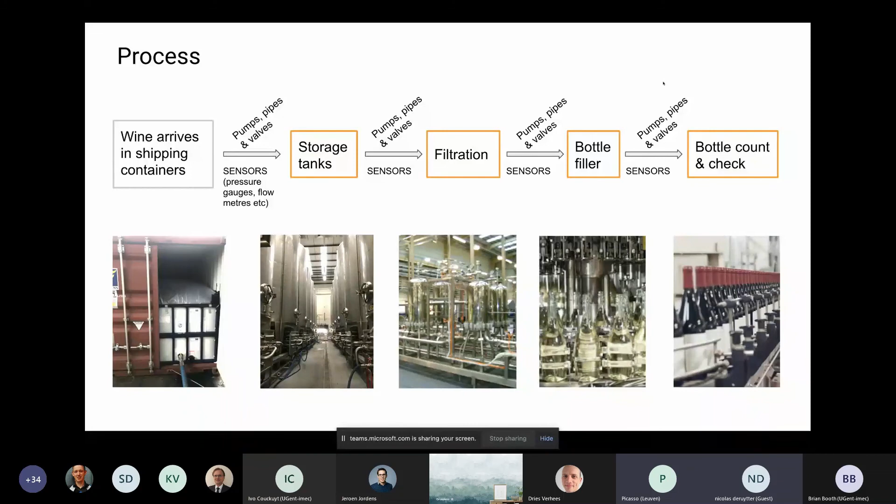And basically just to visualize the entire process, because previously they could just see parts of the process. So we visualized the process, and then we implemented very simple logic. So we said, okay, if you look at the production process, if the storage tank is depleting, then surely we would see some fluids coming into the filtration step. If that is not the case, something is going wrong. So that's a very simple rule.

So then we applied more advanced methods, and we used actually a paper from the Department of Femke Ongenae in UGent, and they are really world class in this. It's about adding semantic databases in production for semantic feedback in combination with anomaly detection and root cause analysis.

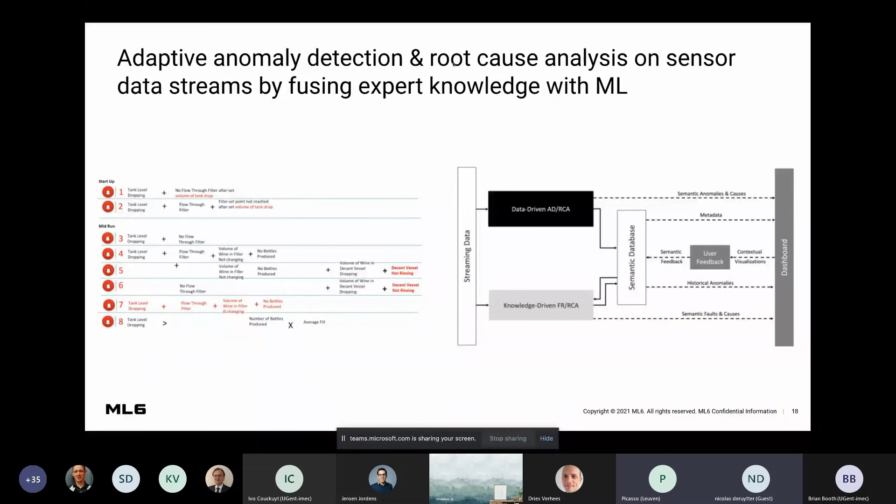So that is something that has happened in section 7. And in other ones, you could see that it also suggested specific adjustments to existing rules. If it makes sense, they apply it. If it doesn't make sense, they are going to look a bit further. But the key part here is that if you extend anomaly detection and root cause analysis with a semantic database, it really helps in adoption and explainability as well.

So then the third part is finding causal effects. And what we typically use all the time is PyCausality in combination with Tigramite. Very interesting, and we always combine both of them, and I'll explain why. So PyCausality is a Python package which interestingly shows correlation with a time delay.